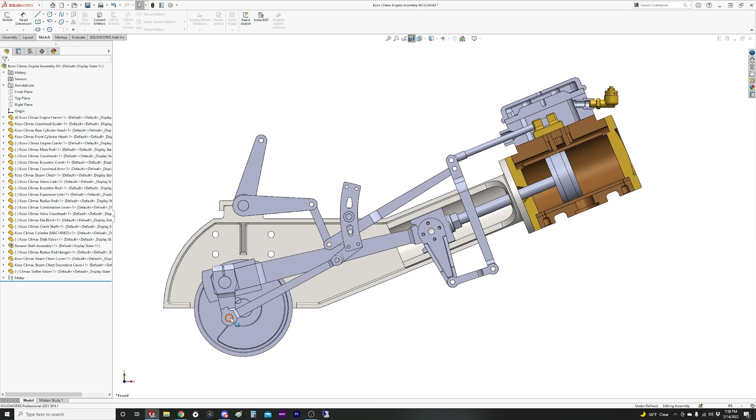I've just noticed actually something's broken here. SolidWorks keeps flipping the crank on me. For outside admission, when the engine's moving forward, the crank is supposed to be leading. On a rod locomotive it'd be the axle, but on this it's the crankshaft. So I have to break some mates to fix that real quick. Okay, there we go. Now it's on the correct side for outside admission.

So the reason this is called outside admission is because this whole chamber is filled with steam pressure. When you open the throttle, this is what fills with steam pressure. And that steam comes into the steam port from outside of the valve. On an inside admission valve, steam comes in from the inside of the valve. So it's set up a little bit differently, but the principle is the same.

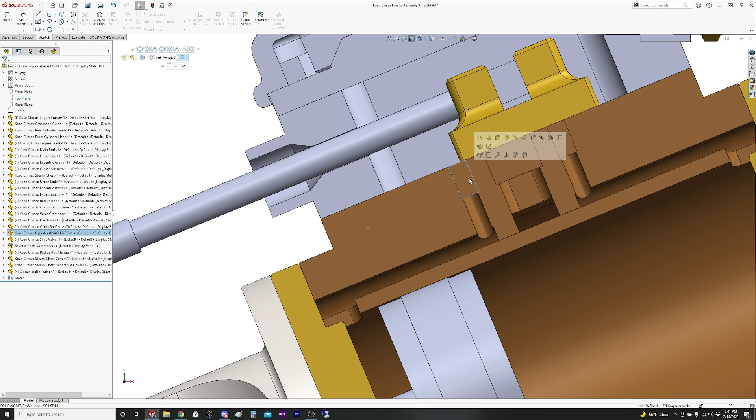Basically, the whole point of valve gear is to control the motion of this valve so that steam gets admitted to the cylinders at the correct time in the right place. So once we're at the back of the cylinder here and it just barely starts moving forward again, this port is exposed. And that lets steam into the back behind this piston, and it continues to push it forward.

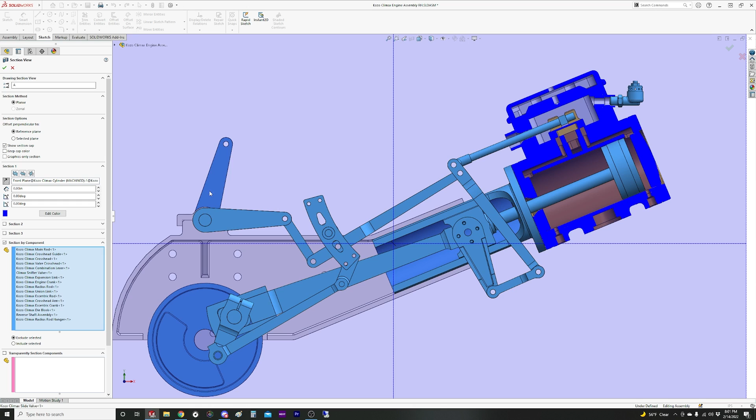It moves happily along, steam still getting admitted. Right there it gets cut off. So now steam's cut off and the expansion of the steam continues to push the piston forward. And actually I should cross-section the valve too here. So right before the end of the stroke, right before the piston gets to the other end, this chamber exposes the steam passage to this center port, which is the exhaust port.

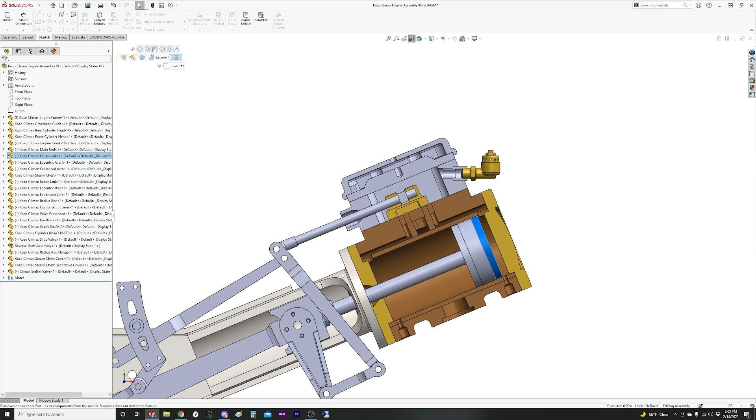So this is when you hear the chuff. This is when all that steam pressure that's in here rushes out through the inside of the valve and out the exhaust port. So now we're at the end of this side, and then once we get just past center, this side opens up. Now this side's exposed and is allowing steam to enter on this side of the piston so it can push it back the other way. And this repeats over and over again, and you get a continuous cycle.

Walschaerts is basically broken down into two independent sections that work together. So you have these three rods, the union link, combination lever, and the radius rod. This controls your lap and lead. And then your link, eccentric rod, and eccentric crank, these control your forward and reverse valve travel and cutoff. So they add to the motion of the other three components to give you the valve events that you want.

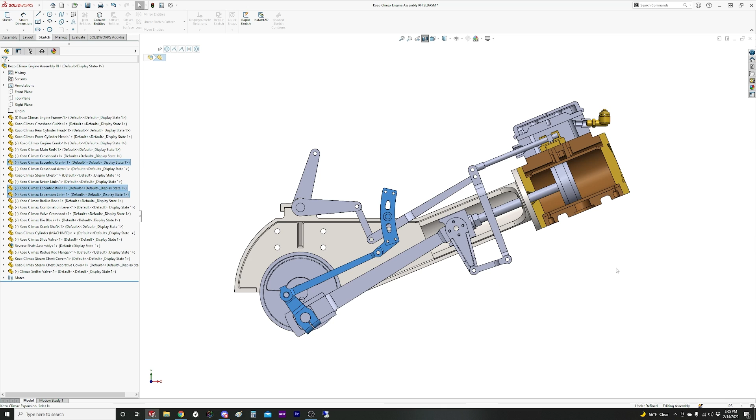So lap and lead, we'll go over this a little bit. I need to move the reverser to center, which I think should be about there. This is when the engine is in neutral. Now you can see, relative to before, how little the valve is moving, and it's actually not even uncovering the ports. It's moving just enough to keep them covered.

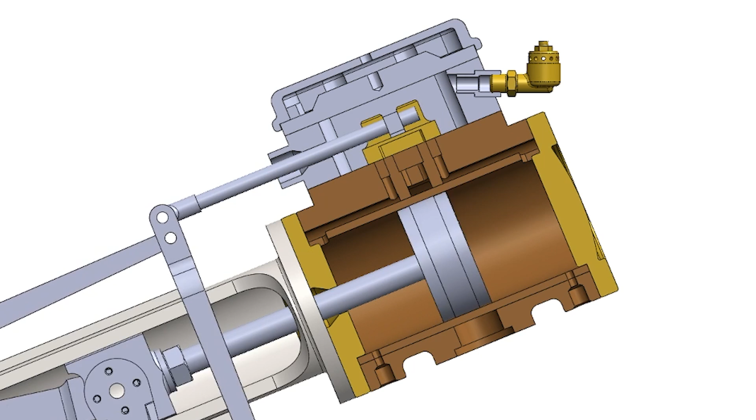That is because this engine does not have any lead. So this valve only has lap. Lap is how much longer the valve is than the ports, so that the ports don't come uncovered.

Now, if this valve gear design had lead, then that lead would be built into the radius rod, combination lever, and union link design, so that the valve would just barely uncover the outside of the ports. What that does is right before the piston gets to the end of the stroke, the valve will start to open to sort of cushion the reversal in direction. I believe that's what it's for. That's what I've understood it to be for. If someone knows another reason why lead exists, I'd love to hear your thoughts in the comments.

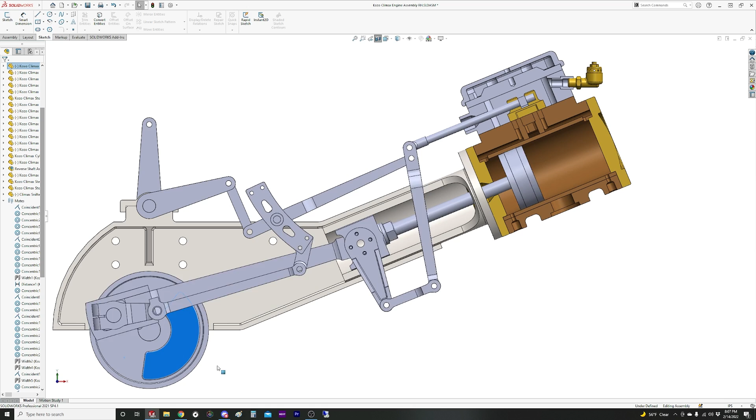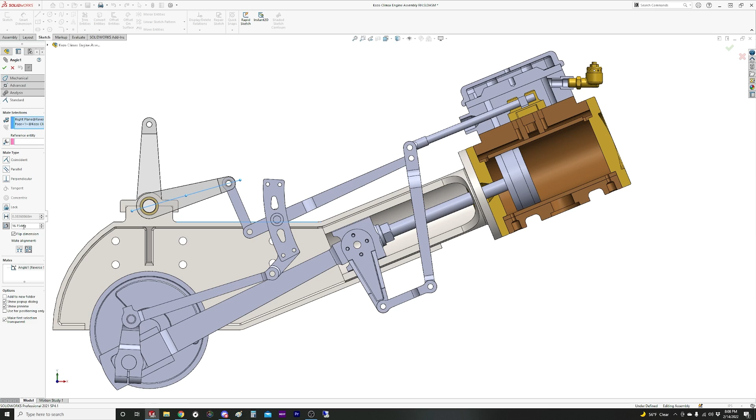So that's what lap and lead are, and that value is controlled, well, in part by the valve, how much longer it is, and also by these three rods. So that's all the motion that those three rods input to the valve. Then once you start bringing the reverser down, to bring the die block down in the link. So this is only a little bit past center now. Now you can see we get a little bit more travel, and it's actually uncovering the ports. Not very much, but it's enough to move the engine.

You wouldn't be able to start an engine, but if you're already moving, this would be just enough steam to keep you going. So you can see the port is open, but it cuts off pretty early. We're maybe right around halfway through the stroke, and steam's already cut off. With the momentum of the engine and the expansion of steam, it'll keep pushing it forward. And then when you're in full gear, then you can really get some power behind it.

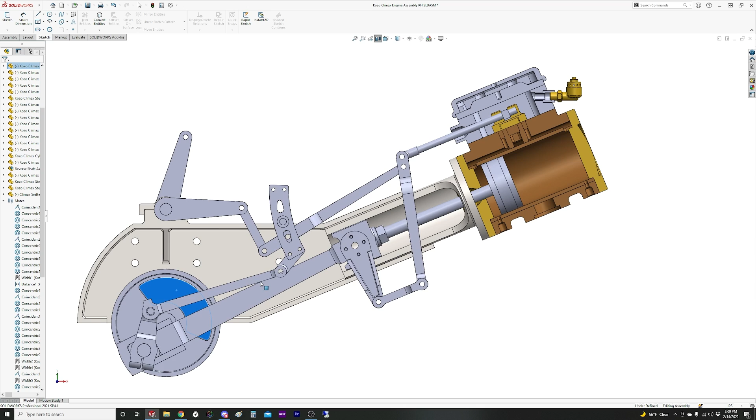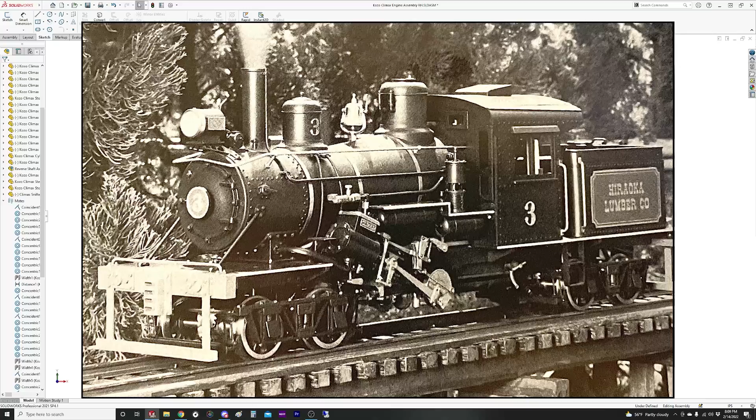Okay, so that's the overview of Walschaerts valve gear. So now let's talk about how to actually design it. I'm going to use this engine as my example since this is what I've been working on. This is basically the Kozo Climax engine. I've been scaling it up to 1 inch, and I've also made some changes. Because of those changes, I had to make modifications to the valve gear, but also since I'm scaling it up and converting it from metric to imperial, I was going to have to make some minor changes anyway, just from the scale conversions.

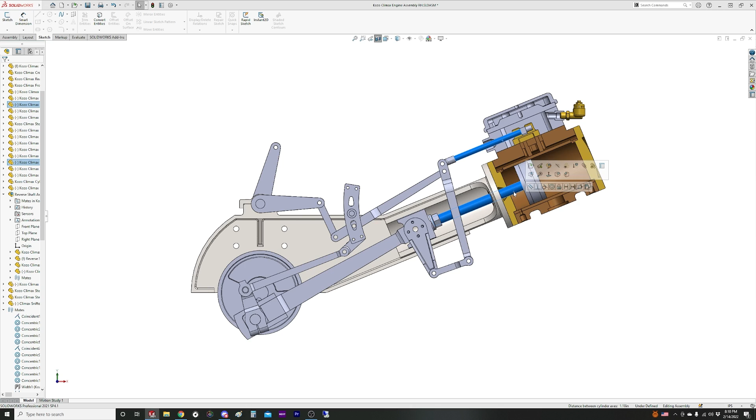I also adjusted the proportions of these links just to make them look a little bit more like the prototype. I raised the valve stem up, the distance from the valve stem to the cylinder. I made it a little bit taller so that I could make the cylinders look a little bit more prototypical. This is why Walschaerts is such a flexible valve gear design: you can put things pretty much wherever and just design the valve gear around it. But you have to have a fixed set of variables, and it doesn't really matter where you fix them, but you have to fix them somewhere.

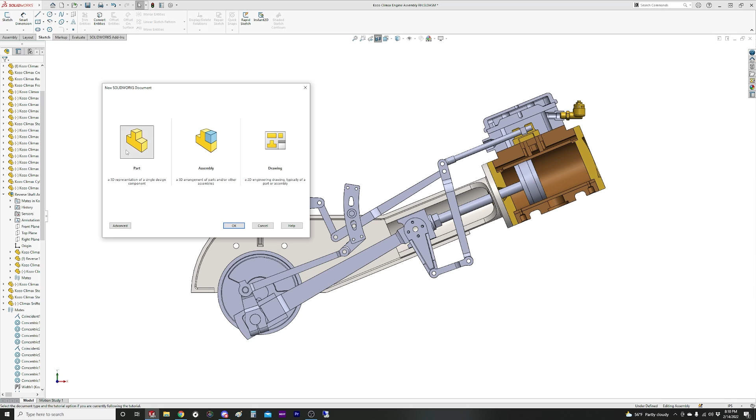You have to decide. So if you're working on an engine that's already built, maybe it has some machining errors in it, you need to figure out where things are exactly, so you know that those are your fixed variables that you're designing the valve gear around, or using those to check what the valve gear should be. Let's actually get into it now. When I'm drawing up an engine, I'll just lay out the valve gear in a sketch, basically the way they used to do it in the old days, except I'm doing it on a computer. So a lot of the math is done for me, and I just have to lay it out geometrically.

I have a friend that has done this in Fusion 360, which is free software. So I know it's possible. I learned how to draw in SolidWorks, so for me, drawing in Fusion is a huge pain in the butt, but if it's what you learned on and it's what you know, it should probably be pretty easy for you.

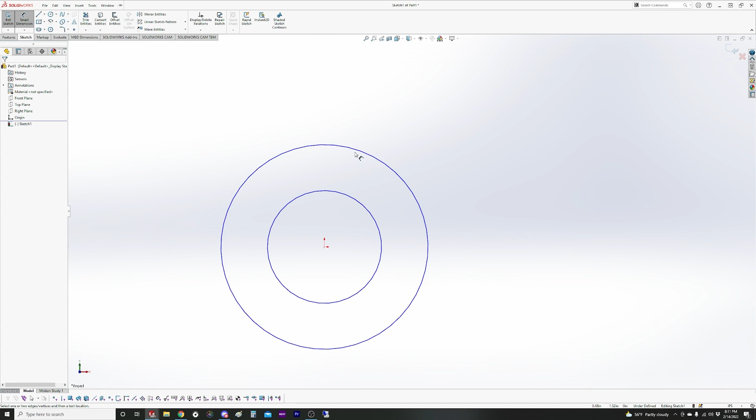So I draw 2 circles. This outer circle is my cylinder stroke, which some of these numbers I just remember offhand since I've been working on it. So my cylinder stroke is going to be 1.285 inches. You can put in here whatever it is for your engine. And then this is the throw of the eccentric. This is something that is really not emphasized in our hobby, and I'm not sure why. When the eccentric crank comes up as a topic, people seem to focus on the length and the angle.

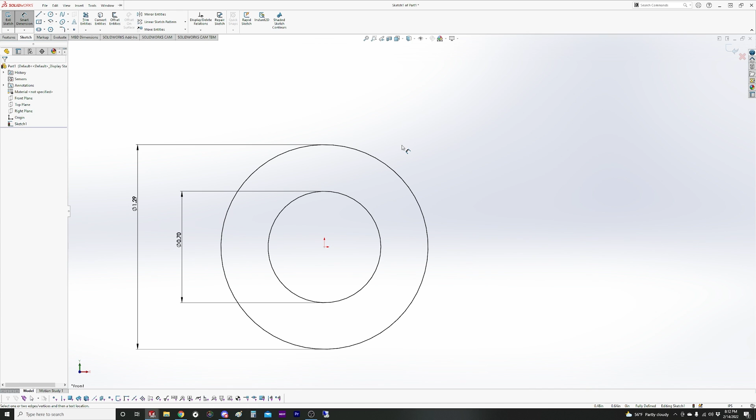So even the way that Kozo has it illustrated in his drawings, he doesn't show the circle of throw of the eccentric, which is the most important thing. He just shows an offset from center line, which I suppose you may be able to set it that way, but I had to kind of work backwards from this to figure out what the circle should be, or something close. It doesn't have to be perfect, but I got it pretty close.

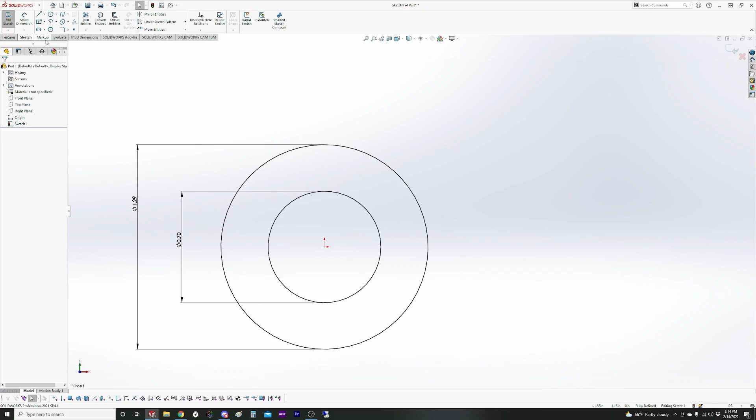I may have just drawn it out and then imposed a circle on it to figure out what the circle is supposed to be, but the radius of travel of the crank is what is important. You can't just go off of a length and an angle and set it there and call it good, because it may not be correct. So these are my two circles, cylinder stroke, eccentric travel.

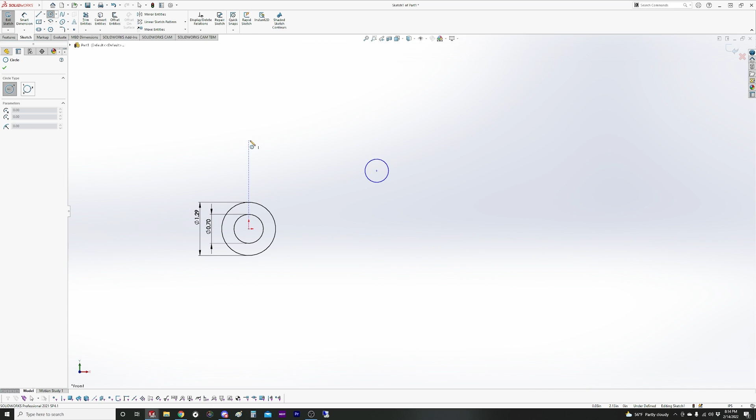I'm going to draw another point up here. I don't know exactly, I have to go back and look at what it's supposed to be. This is going to be my fulcrum for my link, and then I'll put another one up here. This is the fulcrum for the reverse arm. It doesn't matter what size they are. It doesn't even really need to be a circle. You could just draw a point, but I like to draw a circle just because it looks nice. I don't remember what this is off the top of my head. I'll have to look that up, ballpark it for right now, and then I'll go back and edit it.

And then I like to draw a big construction line that represents the distance from the center line of my crank, or what would be your main rod or main driving rod, to the center line of your cylinders. Two points to represent the center lines of your valve and your main cylinder bore. The most important one is the center line of your valve. You don't really need the center line of your cylinder bore, but I like to just put it on there anyway.

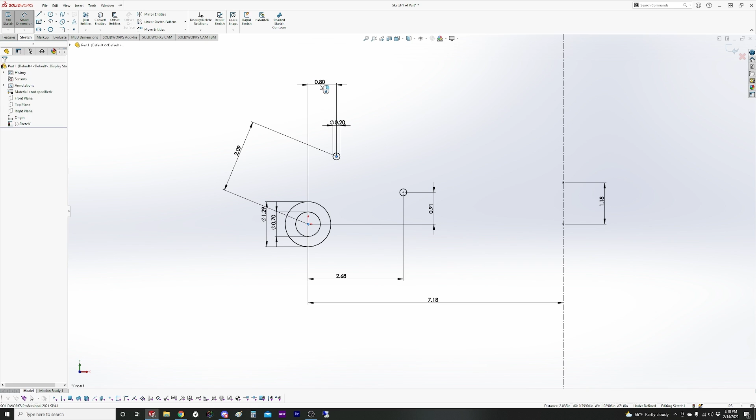Okay, so now I've imported all the correct dimensions, but I just realized that I made the same mistake that I made the first time I did this. So I made this vertical, forgetting that the Climax engine is on an incline. So this actually needs to be moved forward by the same angle as the Climax engine, which is 22.5 degrees. Oh, not that way. About 90 minus 22.5. There we go. And I don't want these construction lines buggering this up, so I'll just do this. Okay. All right. Now, that's step one.

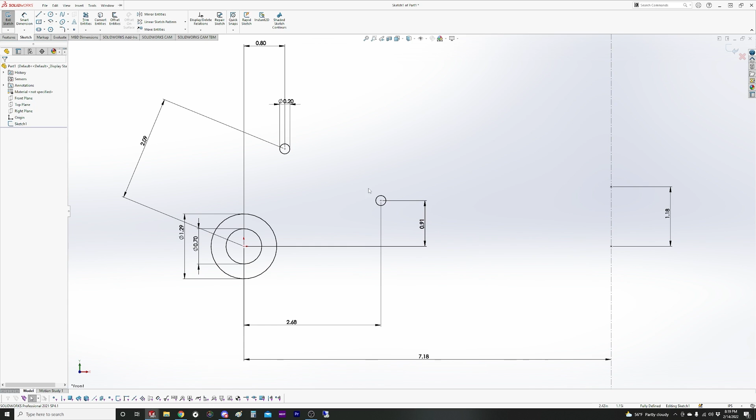So these are my fixed points. These are things that I know where these go in the engine. These are points that you could measure off an existing locomotive, though it might be with some difficulty. The thing that you want to be most precise about measuring, if you are doing it that way, is the position of your link fulcrum. This point right here is very, very important. If this moves at all, it changes everything. It's absolutely critical to know exactly where that is.

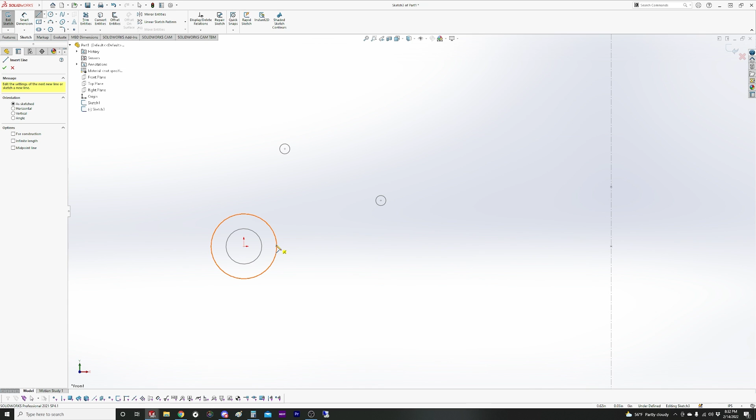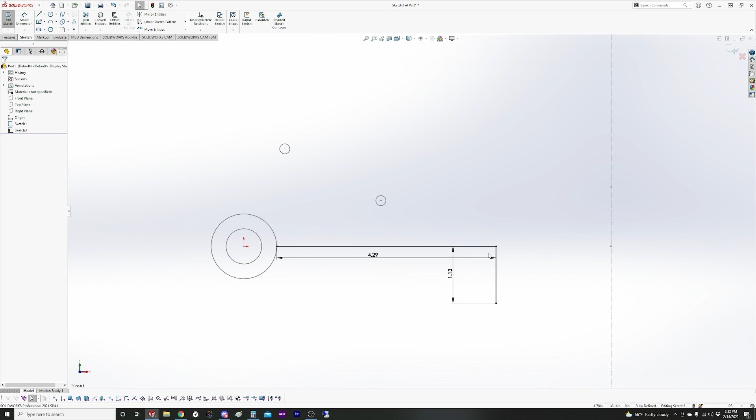Okay, so we have our fulcrum points, stroke dimensions. So I'm just going to draw some lines to represent the rod lengths. So this is going to represent the main rod, which is 4.285. This is the drop down off the crosshead, which is 1 1/8. If your design has a drop down and an offset, you need to make sure to include that. Not very many do, but they're out there.

And then when I draw the lines for the union link and the combination lever, I make sure to draw them at an angle so that they don't snap automatically to being either horizontal or vertical. The top of the combination lever needs to be made horizontal with the center line of your valve. If this is for piston valve or inside admission, you need to make the middle point of your combination lever the point that is horizontal with your valve center line.

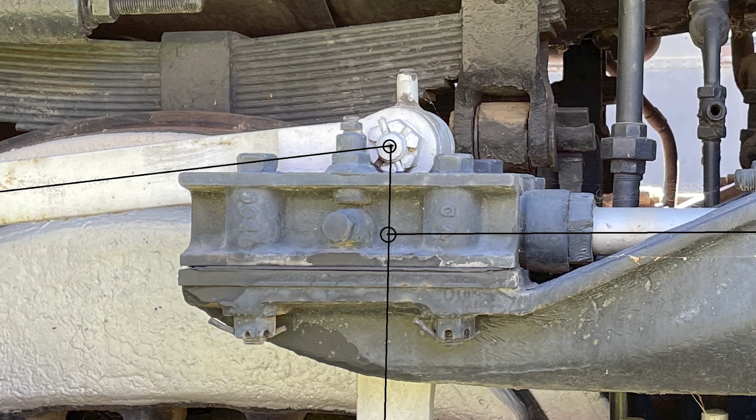From our link fulcrum point, we're going to draw the radius rod, which is 2.463. Got a little mad at me there. Just swing that around. Just put it somewhere that looks kind of close to where it'll end up being. But this has to be to this point because this is the neutral point. So this is the point at which the link inputs zero motion to the radius rod. So this is purely the motion of the lap and lead introduced from these three rods and the crosshead.

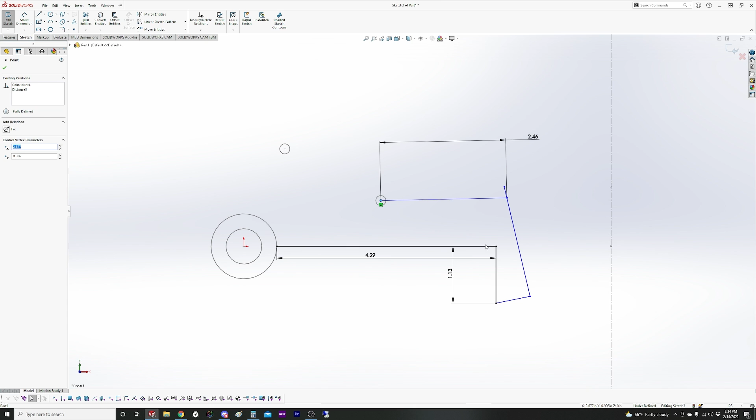So I'm drawing the radius rod, combination lever, and union link at the front and back of the stroke. And I'm going to make these lengths all equal to each other, since theoretically it's the same rod, just in a different position. So the two top are going to be equal to each other, the bottom half of the combination levers equal to each other, and the two union link lines are equal to each other.

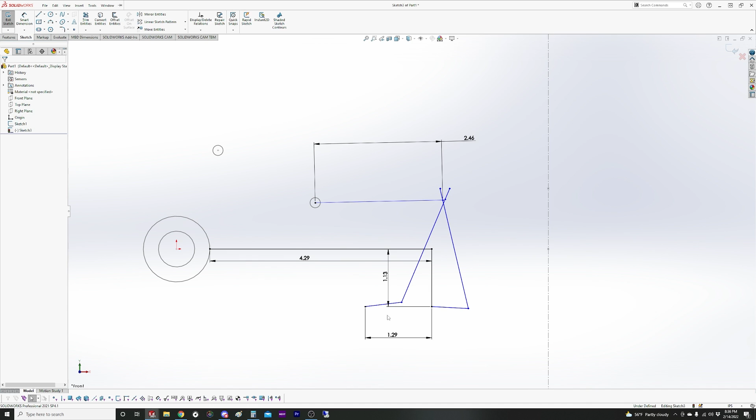Instead of drawing another line for the main rod, I'm just going to put a dimension here for the stroke. So now these 2 points are fixed as the back and front of the stroke. We'll draw another radius rod in here because they probably won't be exactly on top of each other. So now we're getting pretty close.

I want to make the union link the same. I don't want to make any changes to the union link dimension, so that's going to end up being a fixed variable. And the reason for that on this particular engine is because the union link gets very close to the back of the crosshead guide flange. And I want to make sure I still have room for a stud and a nut or a bolt, whatever I decide to do. So I don't want to risk making this any longer than it needs to be. So we'll keep this the same. If I remember correctly, it's 0.803. 0.803. Okay, so that's a fixed variable.

Now if I just kind of drag this around and play with it, which I think is a little harder to do on Fusion, I should be able to see, yeah. So I can see what's flexible, and you can see the distance between these 2 points is a number that I can change a lot, which in turn affects the proportions of these two halves of the combination lever.

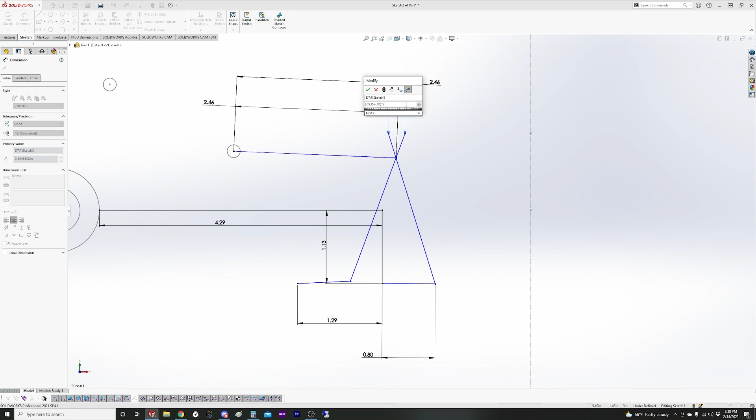So this distance here, this is going to be your lap plus lead times 2. So on this engine, our lap is 0.0535 plus 0 lead. There's no lead, so I don't have to worry about it, times 2. But if you did have lead, say there was 10 thousandths of lead, then you would want to add that in as well, and then multiply that total number by 2. Because 2 times the lap plus lead is the total travel that you want introduced from this combination of rods. So we're going to go 0.0535 times 2, which should be 0.107. Yep.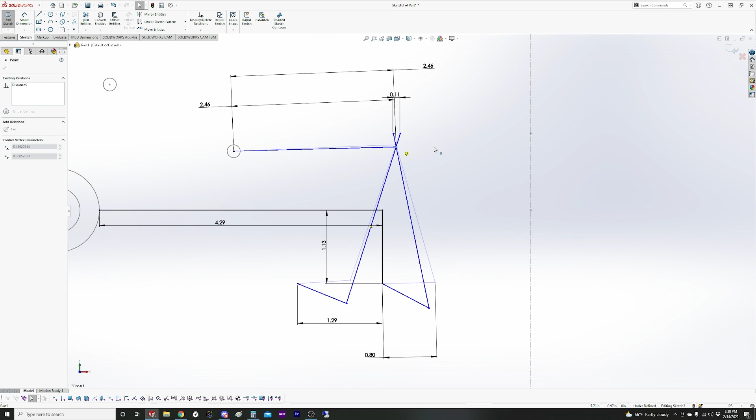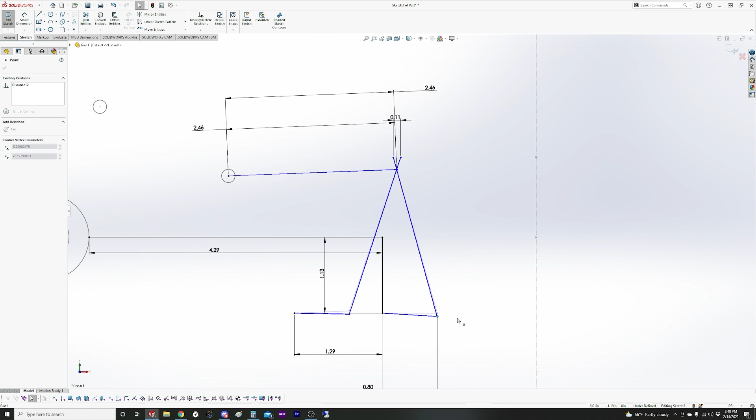Now what's variable? Interesting. So at this point, I would make this the same as your print, or make it a distance that you know will clear. The valve crosshead and the round end of the radius rod have to both fit in this small space. So if you know how much clearance you need, put that in. But really, you can set it to whatever works. You should probably consider the union link, because when it swings, it'll either swing up or it might swing down. So I like to put it somewhere where it'll be even. So that's what I wound up making this.

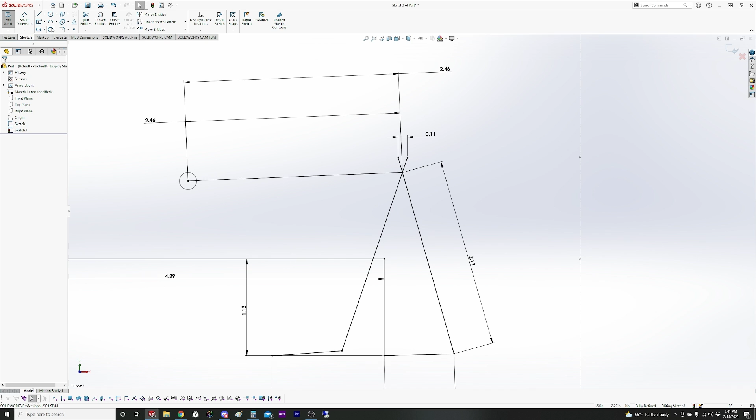The important thing here is that you're getting the correct amount of travel, and that there's nothing too crazy happening here. There's a rule of thumb that the total angle of the travel of the combination lever should not exceed 60 degrees, right? Yeah, it's at 34.2 degrees. So we're fine there. Okay, so now this is done. This is what it needs to be. This is what it has to be for this engine.

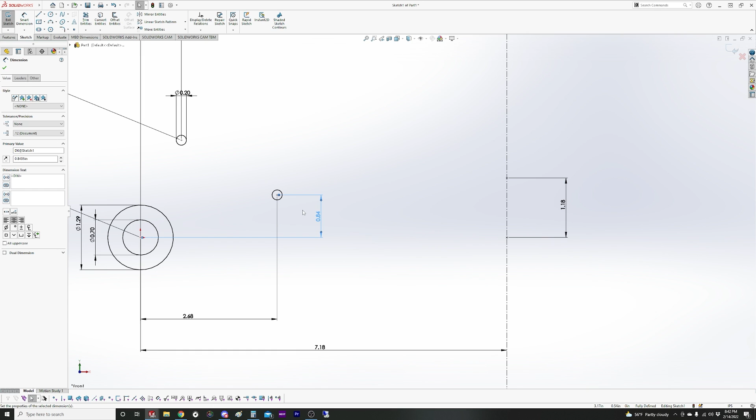Now, there is still flexibility here. Say, if you're designing the engine and you realize the link's too high, it needs to be 1/16 of an inch lower or something, you can come back and just lower it. I actually raised mine. I raised mine up, I think, 1/8 of an inch to accommodate for the fact that I made the valve center line a little bit higher. I had to increase the height of the fulcrum.

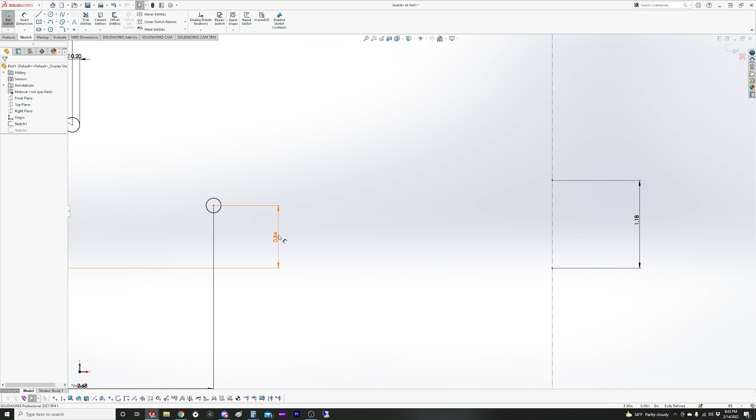So if I needed to drop it back down for some reason, it changes the lengths appropriately. So it would have changed this length a little bit. Let's see, it's 0.1823 right now. So now if I move it back to where it was, now it's 0.182. It's hardly even smaller, but it did change it to make the geometry work out and have everything still be equal.

So there's tons of flexibility with this valve gear. Okay, now the link has to be next. You may notice that the radius rod here is at a slight incline. It's at a slight angle. That's perfectly okay. I almost always see them lower at a slight angle.

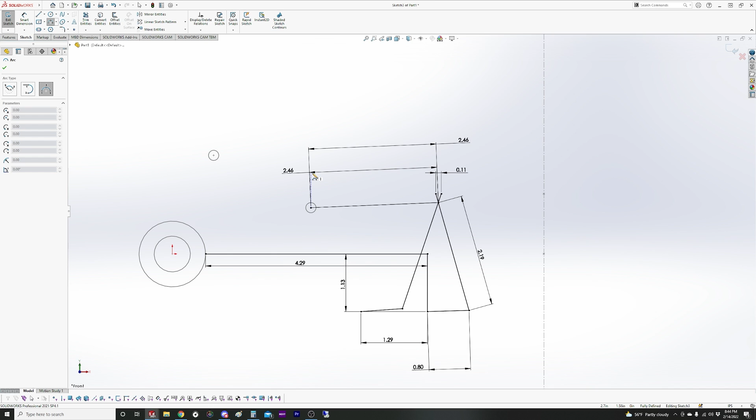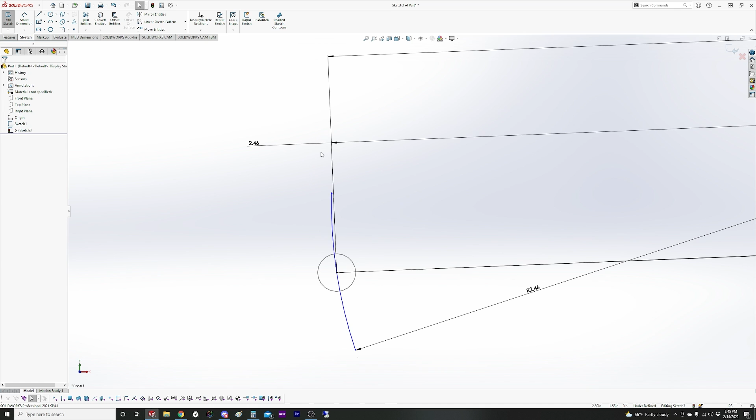The reason you can't draw the link until this is designed is because this angle has to be taken into consideration. The radius of your link is going to be equal to the length of your radius rod. It was 2.463. I like to make this segment midpoint with the fulcrum just to make it nice. And the way I make the offset foot is with a series of center lines. Draw a center line from the center point of the arc to the middle, perpendicular line down and over.

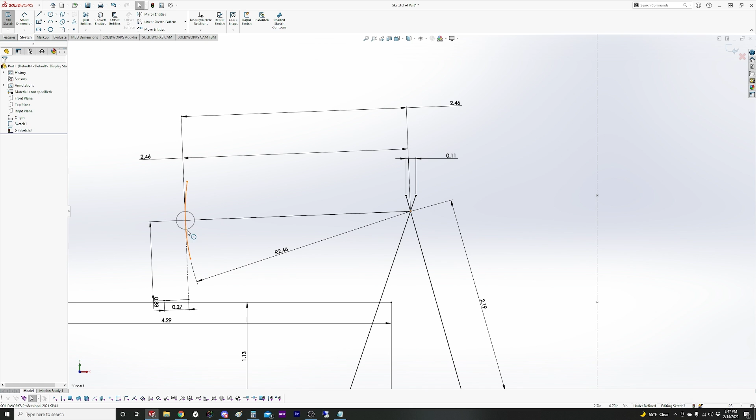This is only a 0.002 difference here, but I drew a little construction line between those 2 points and put a little point right in the middle of that line, and I'll make that point coincident with this line here. So that will put the angle, you can see this is at an angle that's perpendicular to the angle of the radius rod when it's in neutral. And I split the difference. It's so minor, you would never see that, but just for the sake of trying to make this as good as possible here.

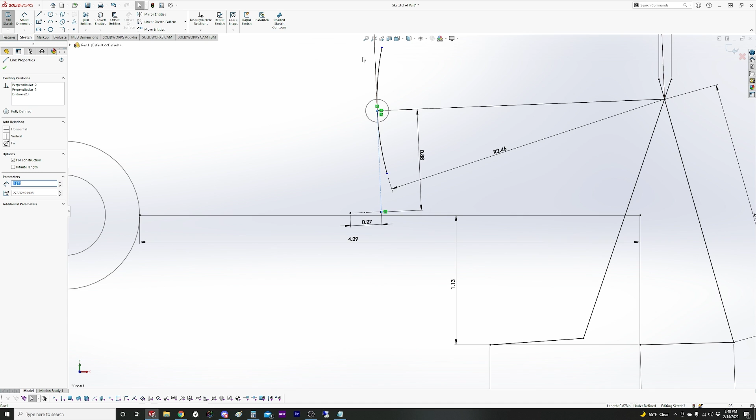Now we've fixed the attachment point to our link by setting this angle, this little backset angle here. And now we can draw our eccentric and eccentric rod, which has to be defined by the radius of travel. So since this is outside admission, the crank has to go this way. On a piston valve engine, it would be this way, but it's going to be this way for slide valve outside admission. So we're going to draw a line to represent our eccentric crank and its attachment point on the radius of travel. And then we're going to draw a line to represent our eccentric rod.

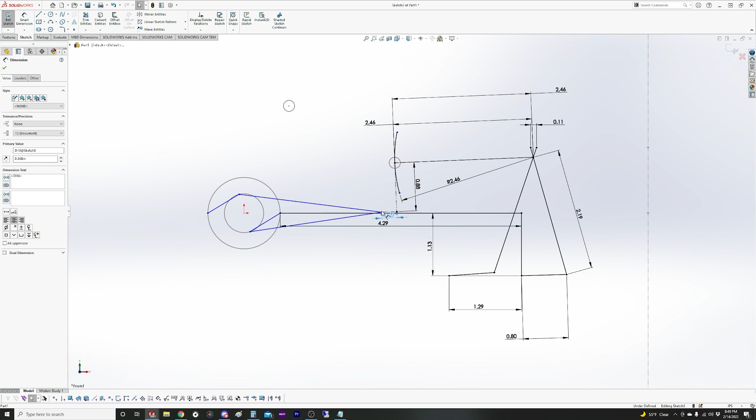And then we're going to do the same thing on the back side of the stroke and connect it to that same point, because this is where the link has to be at both the front and back of the stroke. The proportions of these two rods has to be such that at the front and back of the stroke, it puts this point in the same position, at the same angle. So this is very easy to do, at least in CAD. You can figure this out on paper by doing just a little bit of triangle geometry, get out your Pythagorean theorem. But all we have to do is make these two segments that represent the crank equal, and make these two segments that represent the eccentric rod equal.

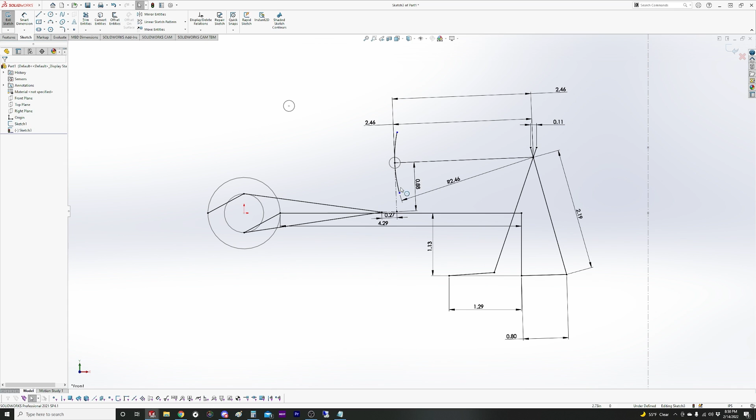Done. So now any change I make, if I need to change this angle, in fact, I'll show you. If I needed to change the angle, these change with it. So you can see how those are changing. I mean, this is grossly exaggerated, obviously, but you can get a very, very precise calculation for what those rod lengths are supposed to be. So we'll set this back. We are almost done. We can say with pretty good confidence that so far everything we've drawn here is correct.

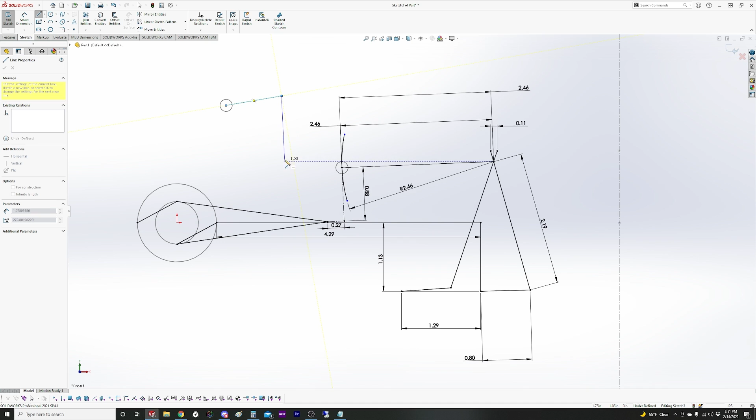We do have to take into consideration the radius rod lifting link and the backset of the radius rod. I have seen on some forums before people saying that these don't have a great impact on the valve gear, but that is extremely not true. It is true in neutral. It's mostly true at low cutoffs, but when you get into full gear travel, you are going to have a very bad time if these lengths are not correct. Because what's going to happen if these aren't correct is you're going to have very, very uneven cutoff from the front and back end of the stroke. You might have 80% cutoff on the front end of the stroke and like 65% cutoff on the back end of the stroke. If your engine is square to the world, you're going to have uneven chuffs.

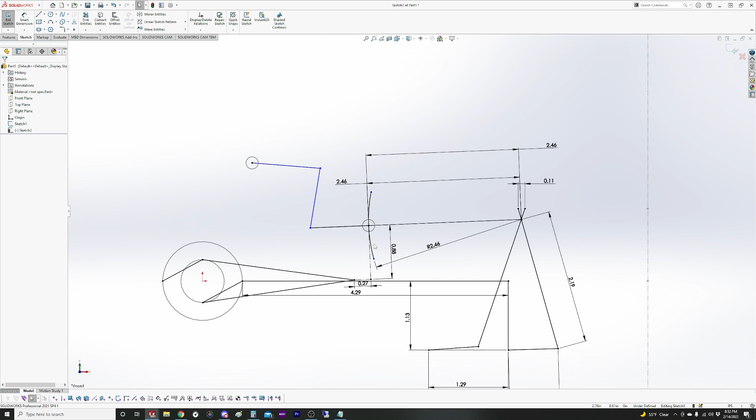You'll end up having a strong chuff in the front and a weak chuff in the back, or vice versa. And that's because this link affects the way that the radius rod swings inside the expansion link. So that's the next part of the puzzle. So from here, we'll do another sketch on top of this. We'll sketch it out with the radius rod in gear.

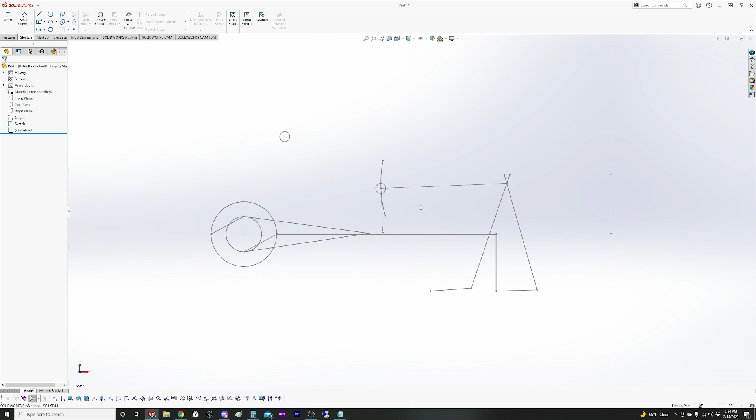And there's always going to be a little bit of error. On mine, what I actually wound up with, I think I have about a 1.5% difference in full gear between my cutoff at the front and the back. So the valve travels just slightly further in one direction. And it's the same thing on full-size locomotives. I was looking at a chart just last night. One of the British engines, I don't remember which one, had in full forward gear like a 3% difference from forward to back on the cutoff.

So now we need to draw the valve gear in the middle of the stroke. The middle of the stroke is not super valuable information for timing a locomotive, but the middle of the stroke is where, when you're in full gear, the link is at the front of its stroke, because its cycle is 90 degrees off from the main crank pin. So when the crank pin's halfway through its travel, the link is at the end of its travel. And that's what we're worried about with cutoff. Well, not exactly with cutoff, but as far as how far the valve is able to travel in either direction. So let's just start putting some stuff on here and just throw some lines on.

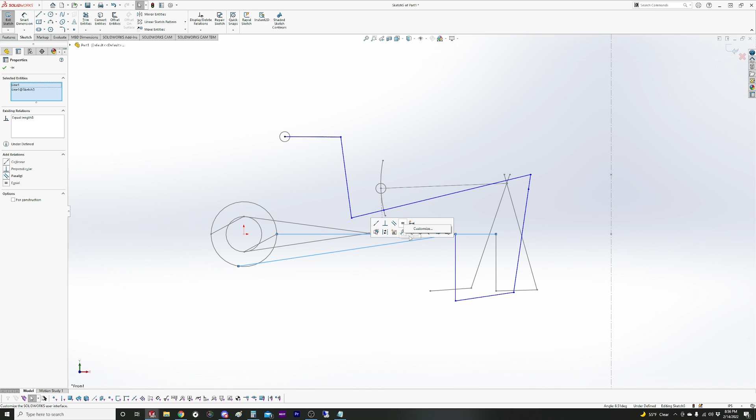This is the trick to getting fast at drawing in CAD, by the way: don't worry about drawing it correctly. Just throw the lines on there and then go back, put some restrictions on the geometry, and then go back and put your dimensions in. It is so much faster. We actually don't need to put dimensions. Since we have all this stuff in the background, we can just copy over. I'm going to grab the main rod line and my new main rod line and just make them equal. Same with the union link and the two segments of the combination lever and the radius rod.

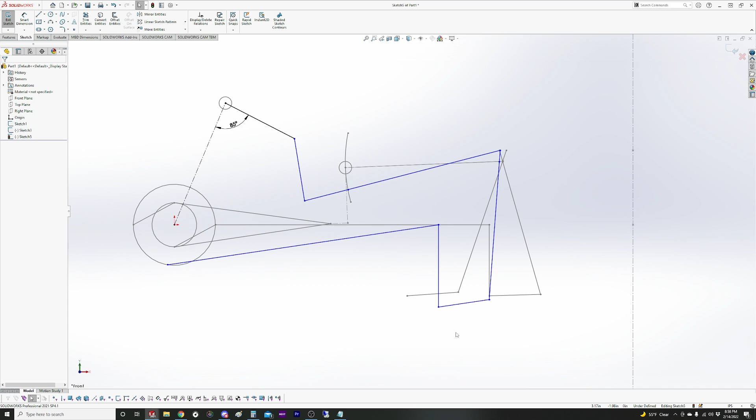And now we are not going to put this at the center of the fulcrum. We're going to have it down here somewhere. So one thing you need to decide is where you want this to be when you're down in full gear. On this engine, I wound up making this 85 degrees, just purely based on looking at pictures and videos of Climaxes. When it was in full gear, the radius arm was maybe just slightly lower than horizontal. This would actually be closer to that, right? Because it's at an angle. But okay, so now we have this. We don't know exactly what we want these to be yet. And despite what some people think, it does have a significant impact.

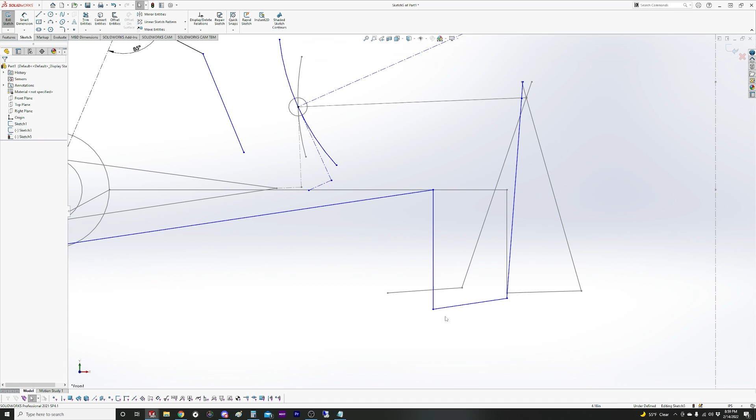I made a mistake. Forgive me. We have to redraw the link because right now it's at the neutral angle. So we're going to do the same thing as before, but now I don't have to put the dimensions back in. Yay. Another thing we need to do, because we want this in the middle of the stroke, I'm going to type out our stroke, 1.285 divided by 2. Just kidding. Why won't it let me do that? Okay, maybe I can do it now. 1.285. There we go.

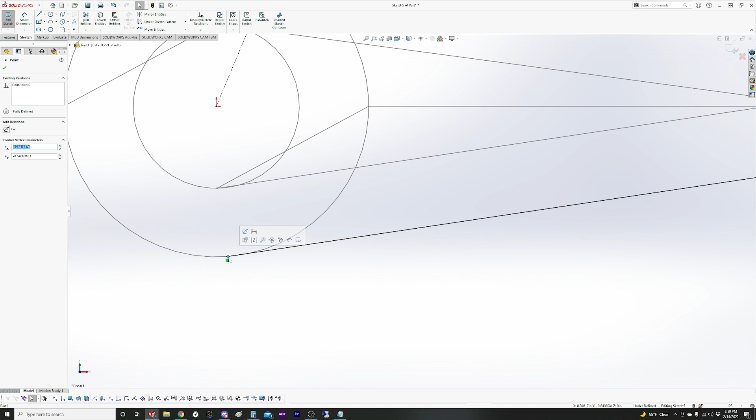It's important to define the mid-stroke this way based off of the crosshead position, because if you were to, say, do it off the main rod position and make this point vertical to the center of your main rod or crankshaft, that would not actually be halfway through the stroke, because as you can see here, the main rod is actually slightly past center. Just know that the halfway point has to be defined by the crosshead and not the percentage of travel on this arc. Now that we know where our main rod is when we're halfway through the stroke, we can put our eccentric geometry in here, our eccentric engineered geometry, you might say. Okay.

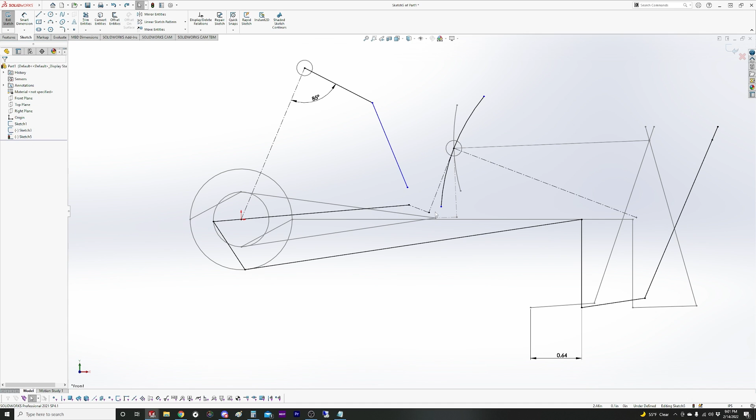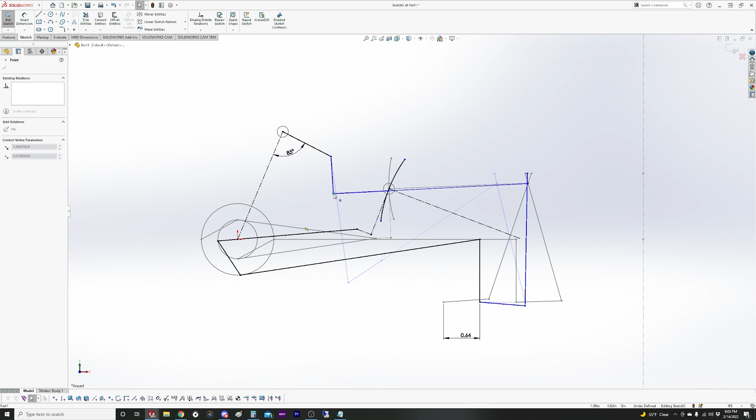So now with this information, now we know where our link is. Now, in full gear, instead of being connected to the fulcrum, it's going to be on here somewhere. And then we have our back set here. Make this collinear since it's the same rod. Okay, so now we don't know what this needs to be just yet. We need to draw the other side first.

Actually, we need to draw the link again. We'll draw another link on here. You know what? To make this a little bit cleaner, let's do this. So we need to draw another link, and this is going to start to get messy. So we'll make a separate sketch for the rest of the stuff that we're drawing here, just to keep it a little bit cleaner. It's just doing what we've already done.

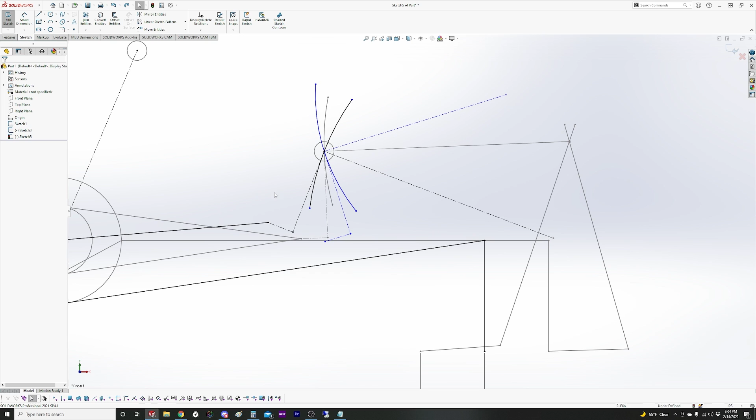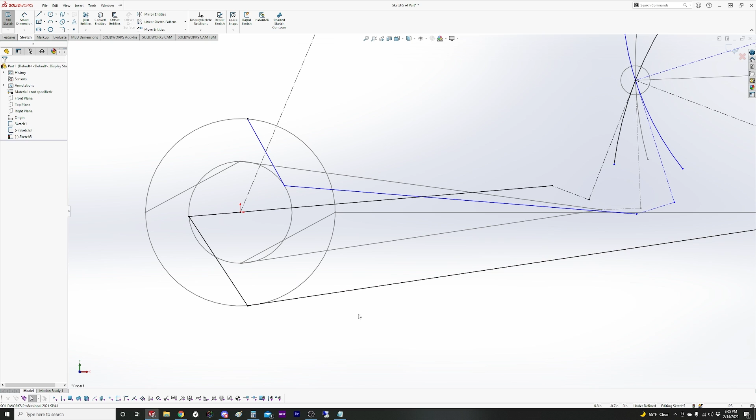So mid-stroke is going to be the same. On the flip side, the crosshead's still going to be in the middle. So all we have to do is draw a line to represent our eccentric motion, and it's going to be at the same point vertically. So we can make this point vertical to the main rod at the bottom, make the eccentrics equal, make the rods equal, and I need to set the radius.

There we go. So now we have our link position in neutral, we have our link position in full forward and full reverse. This is of the link's travel. Okay, we'll keep that in a separate sketch just to keep things looking a little cleaner. We're going to draw the union link and combination lever off of here. Radius rod is going to connect down on the link, and then we have our reversing stuff. Put this back to 85. For now, we just need to get the geometry on there.

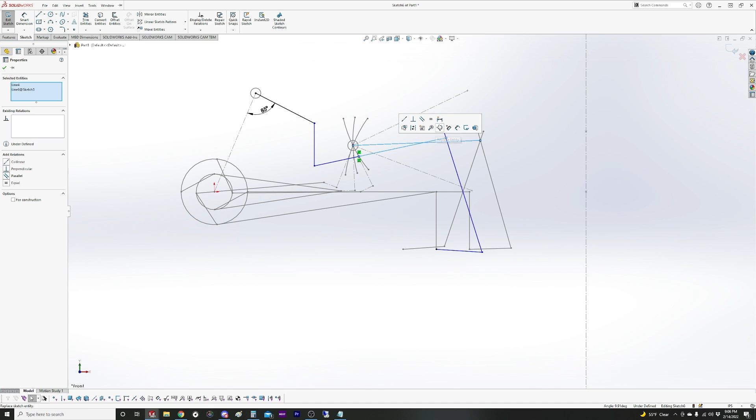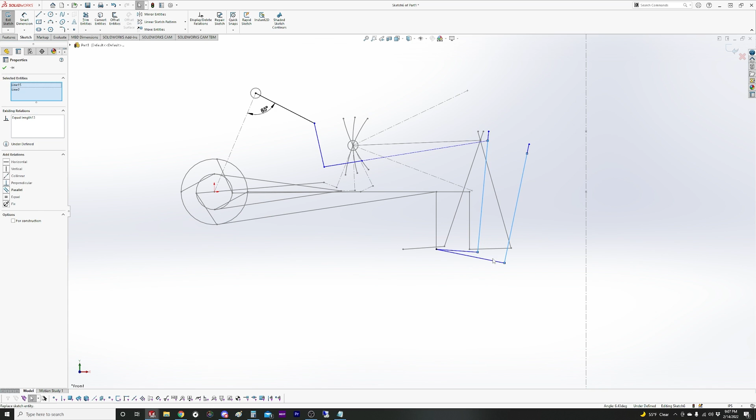Put all our relations in here. This needs to be horizontal. These lines need to be the same length. Make these equal. Make these equal. What's missing here? I think that's it. And we're going to do the same thing again, and it's going to come off the same point. We're going to draw another radius rod, but this one's connecting to the back of the link that's on the back end of its stroke.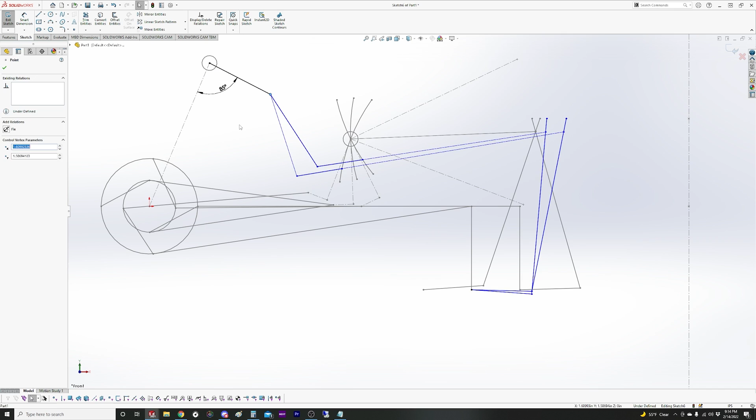These will connect to the same point here. Make the radius rods equal. They're already equal. We want to make these back set lines equal to each other. And we want to make the lifting link equal to each other. We'll fix this line. It's a good idea to make one of these a fixed variable, whatever you know to be, say for example, if you know what this is according to the print for your locomotive, or this, you can see how important these lengths are. They make a big difference if they're not set correctly.

So what I want to do, we want to fix one of them. So it's going to be a bottom limit for the link, how far down it can actually travel. So we want to set it for as far forward as possible. The back of the stroke is where the link is lowest. That's this one. And you can see it's true on here too. It'd have to be really long for it to switch and for the front to be the lower one. So the back is slightly lower, and you can look based on the tall opening of your link in combination with how tall your link block is, how far down it can travel before it starts to interfere.

So now from fulcrum to the back, we decided on 0.347. That's as far down as we can allow it to go in the back of the stroke. So now that has fully defined our location here. You can see we have a little issue. This illustrates probably most clearly why these lengths matter, because this is how you get uneven cutoff between the front and back of your stroke.

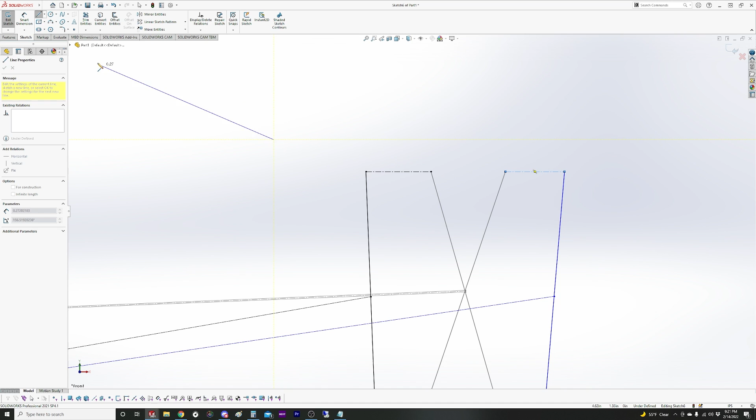What I'm going to do here is I'm going to draw a line from here to here and from here to here, because I know that our neutral swing, the swing of our combination lever in neutral, is definitely even travel over the center of the ports. So I have these two construction lines. I'm going to make them equal to each other. So that forces our valve travel to be equal over the ports at the front and back of our full forward travel.

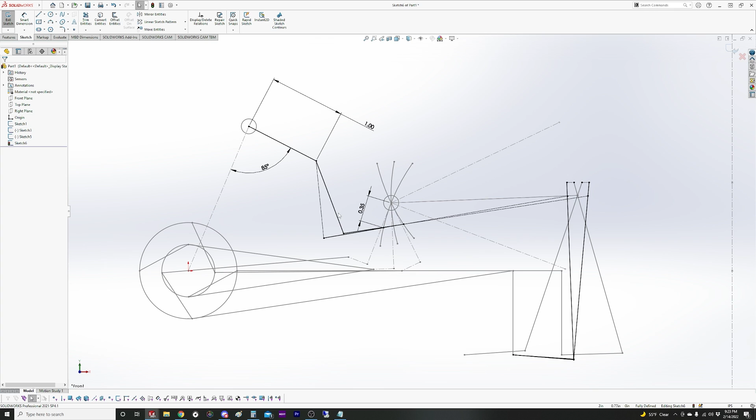So now we have our segments, and we still have some flexibility here. You know, if you decide you want this to change, you can see what it affects. So I made the decision to make this as short as possible.

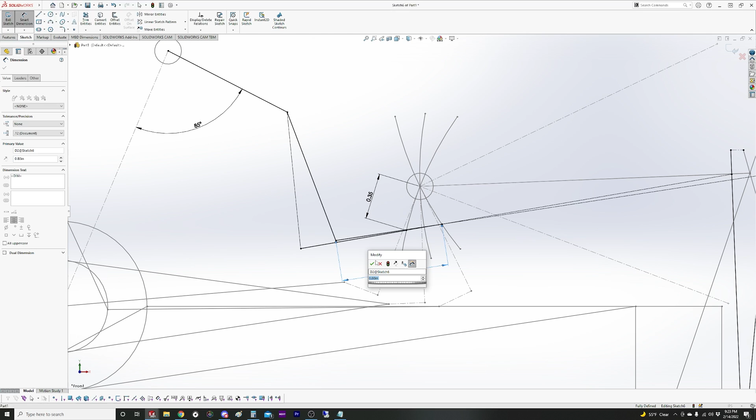Not quite as possible, but a lot shorter. I made it 1/2 inch because, looking at photographs of Climaxes, the reversing arm was pretty close to the back of the link. I made this tighter. I don't remember exactly what it was, but it was quite a bit longer. I think it was around 0.8. So I tucked it up to 1/2 inch.

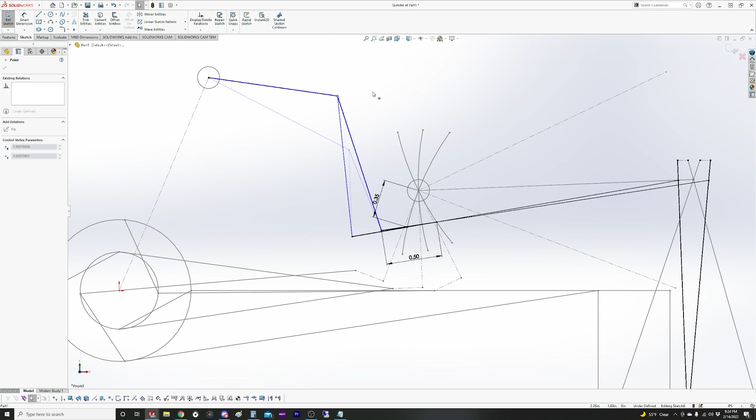And if you're not happy with this length, you can change the angle, and you can play with it this way, somewhere where you like it. All these positions are going to work. Well, not exactly. This would not work, but anything within reasonable length is going to work. This is what I mean when I say that Walschaerts is a very flexible design. I'll put this back at 85 though, because that's where I put it.

I don't think these dimensions are exactly what I wound up doing. So let's see what this length is. I made this 1 3/8. So let's just port that number over. Okay, now we got 1 3/8 there. We can look at these measurements now. We got 0.8528, 1/2 inch there, because that's what I set it to. In order to make this 1 3/8, I had to delete my angle dimension, my 85 degrees. So this matches what I actually have the 3D model at. So it's actually only like 2 or 3 degrees.

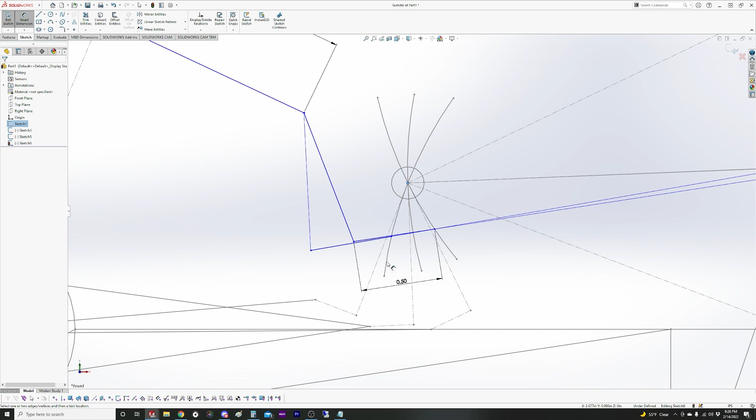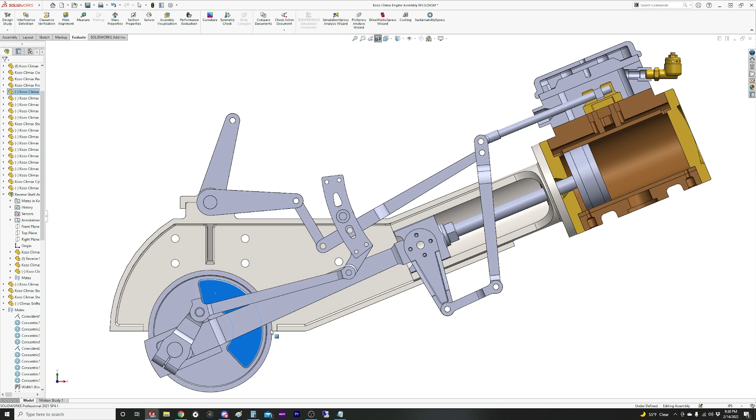That was 347. Well, that's our valve gear. This will be a very square valve gear with very, very close to even cutoff in full forward and in reverse. You don't have to do anything again in reverse if you do all this correctly. So steam's entering into the back and it cuts off there. So what I want to do is just put a temporary relationship in here where those meet. That is going to be cut off. That's exactly the cutoff point.

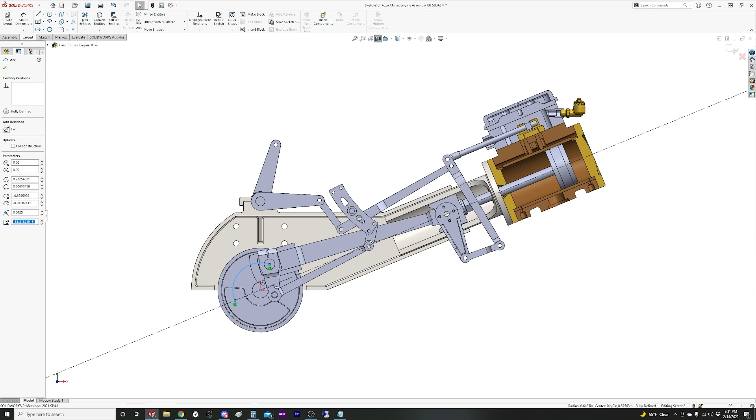So now I'll draw a center line, make it infinite length, because why not? If this engine wasn't inclined, I wouldn't have to draw this line, but it is. And now I'm going to draw a semicircle from the crank to the back of the stroke. And it tells me here how many degrees that arc is. Yeah, 138.36 degrees. So that's how many degrees the crank has traveled before steam admission gets cut off. So I'm going to divide that by 180 degrees, half a circle. So that gives me 76.8% cutoff at this point in the gear. So I'm just going to write that down.

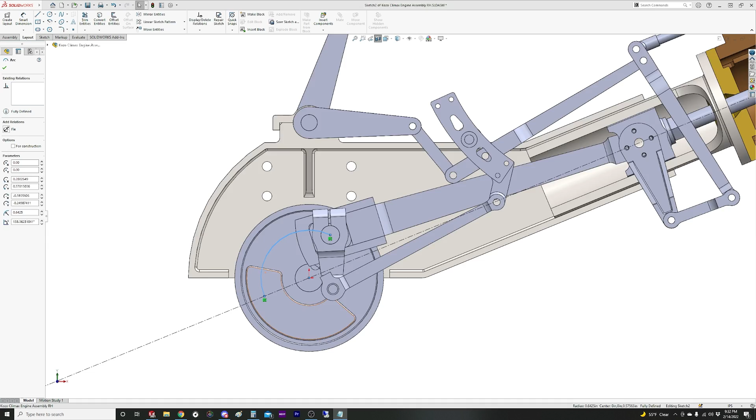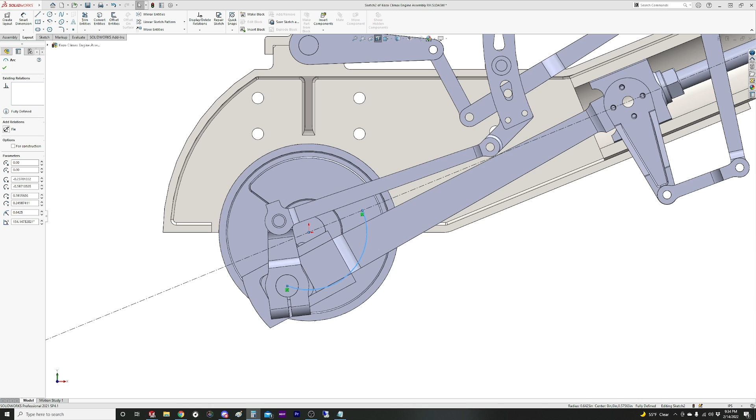And now we're going to go to cutoff on the other side right here. Mate those faces. Okay, the moment of truth. Is your heart racing? Because mine is. Have I just scammed you for the last however long this video is? 134. Which sounds like a lot, but let's do the math. 134.147 divided by 180. 74.5%, yeah, 0.52. 76.86 minus 74.52. So 2.34% difference, which is completely acceptable.

Like I said, full-size engines were more than that. Realistically, yeah, it's 2% off, but that's not something you would ever notice. And if you were timing it by eye, actually, you wouldn't time it in forward anyway. You would time it in neutral. But a 2.3% difference, you're not going to notice that in the evenness of the chuffs. You're not going to notice that in any lurching of one stroke being more powerful than the other. That's going to be really even, crisp, square.

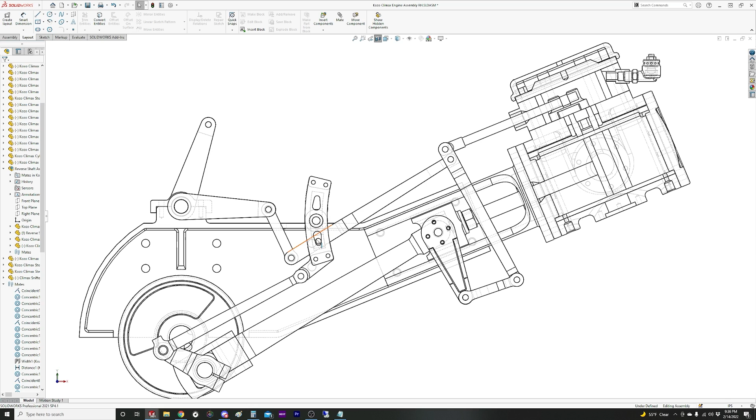That difference does get worse the further down you go. The difference in cutoff gets better the closer you get to neutral. I said I was going to go over inside admission, but for the sake of this being a timely video, maybe I'll do a second video later that just quickly goes over inside admission.

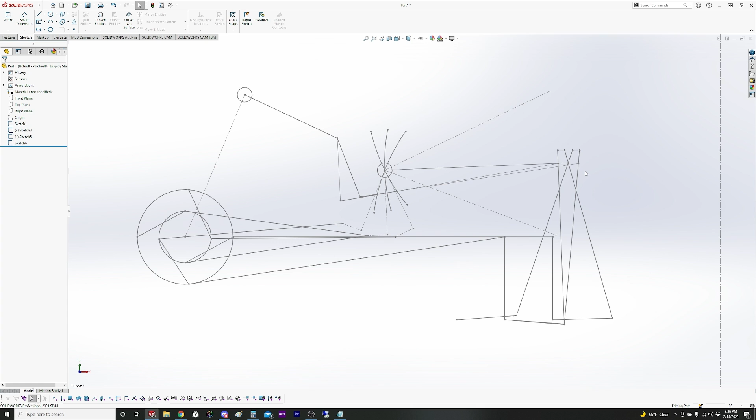Hopefully if you know a lot about Walschaerts valve gear, I hope you learned something. If you don't know anything about Walschaerts gear or even trains, I hope you learned something too. I'm definitely going to make more videos in the future about other appliances and how they work, and do a little bit deeper dives into some of this stuff.